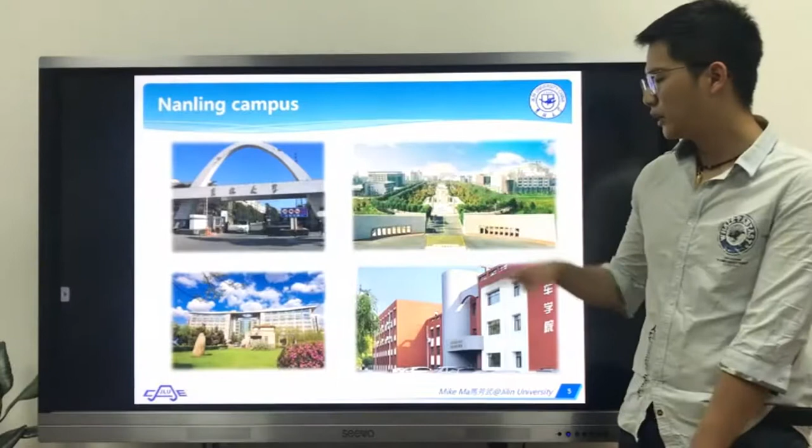I'm a student in Jilin University, which ranked top 10 in China. These are some pictures of my campus. This building is the National Laboratory of Automotive Simulation and Control.

My domestic supervisor is Mike Ma. He is not only a professor in Jilin University, but also the SAE Fellow and the Vice President of FISITA.

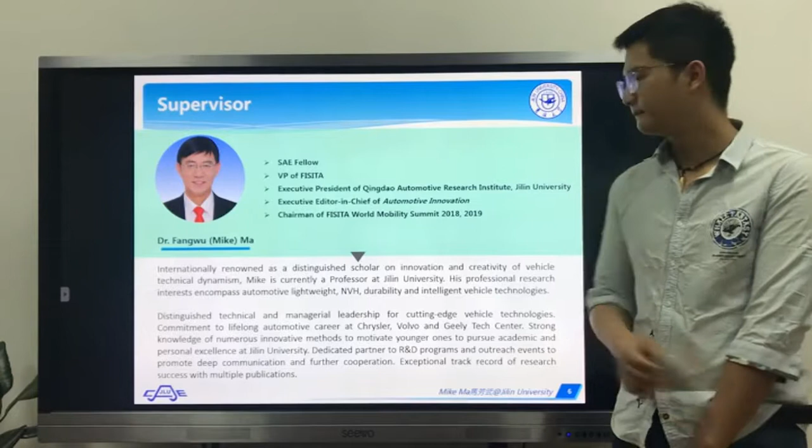My research interests cover connected and autonomous vehicle, advanced vehicle control. It is very honored to serve as main participant in a provincial research project named Cooperative Driving based on coupling control of connected and autonomous vehicle platoon.

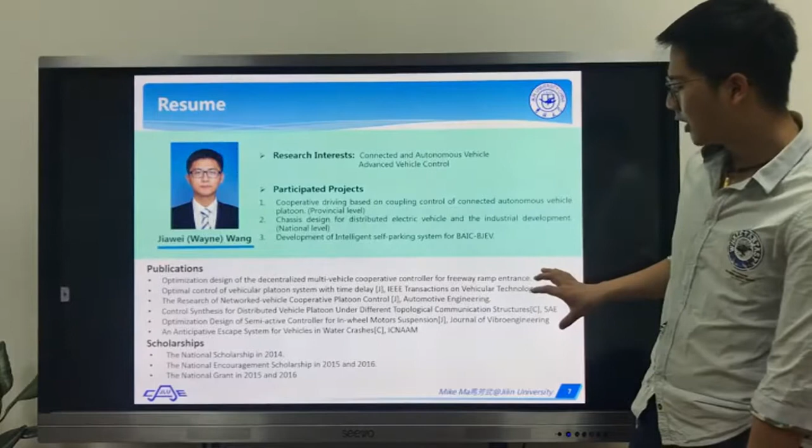I have 6 papers and 8 patents. Also, during the 6 years in Jilin University, I won many scholarships, especially the National Scholarship and the National Encouragement Scholarship.

About the practical experience, I want to share some things with you.

When I was an undergraduate student, I created the G-Speed team with other students to participate in Formula Student Electric China and won 7th place in our first competition. This is the advertisement video of this year's car.

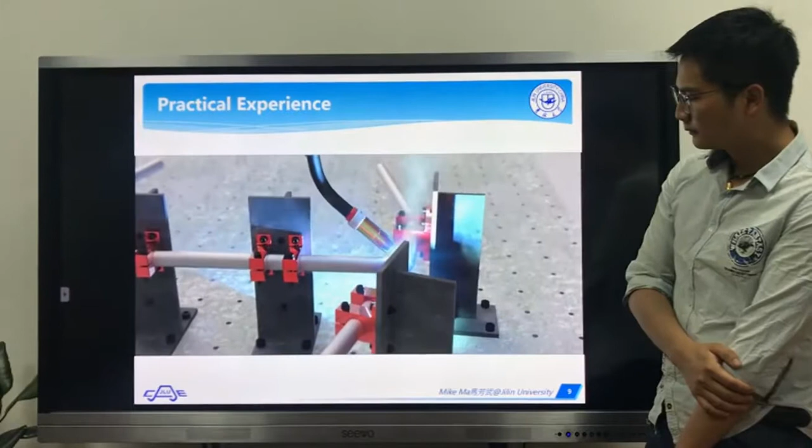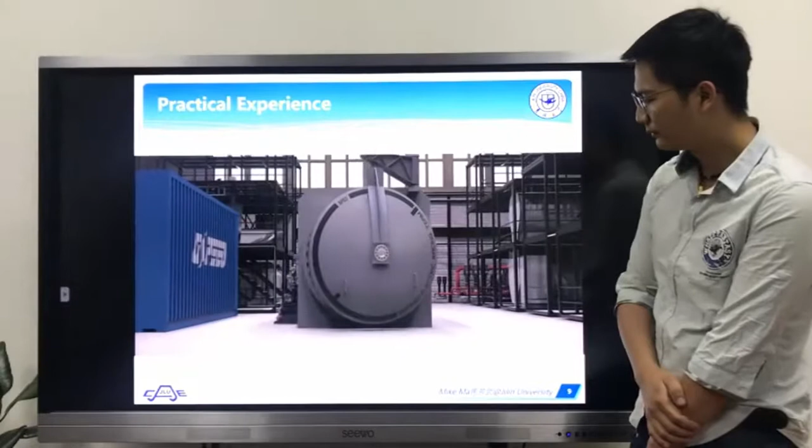The 3D printer is used to build some components, and this is the transmission system and the leader of this group. Carbon fiber is also used to decrease the weight.

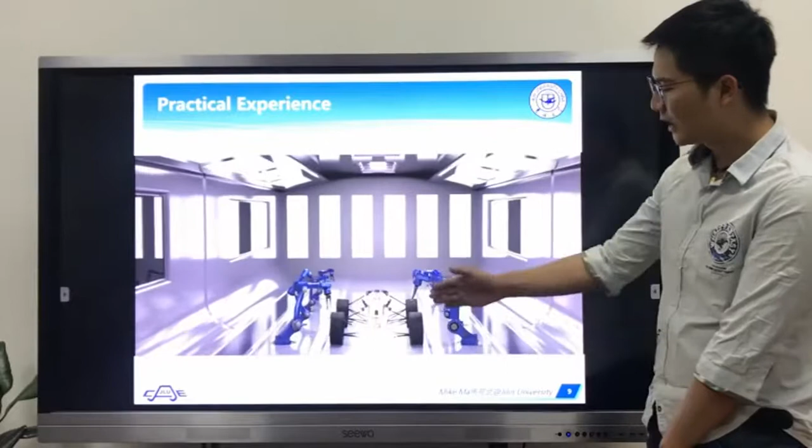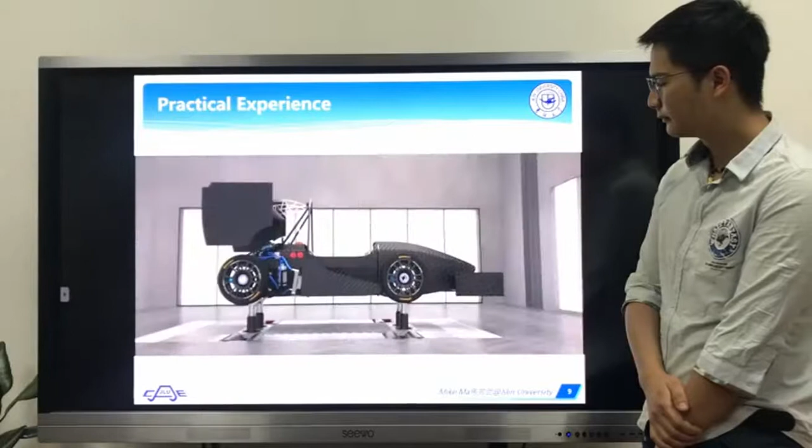The suspension, the braking system, and even the electrical system are all designed and built by ourselves. We also design the BMS. G-Speed feels the need for speed.

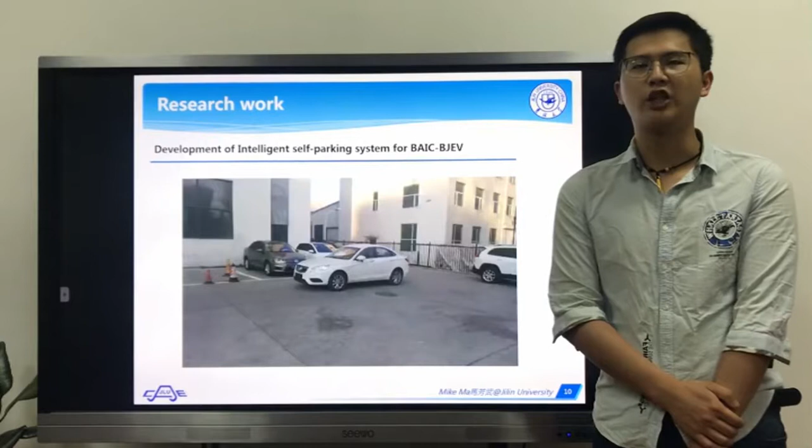In the first year of my graduate study, I was arranged to develop an intelligent self-parking system. During the following 6 months, I developed an algorithm to detect the parking space, size, and location. This is a video of the self-parking system.

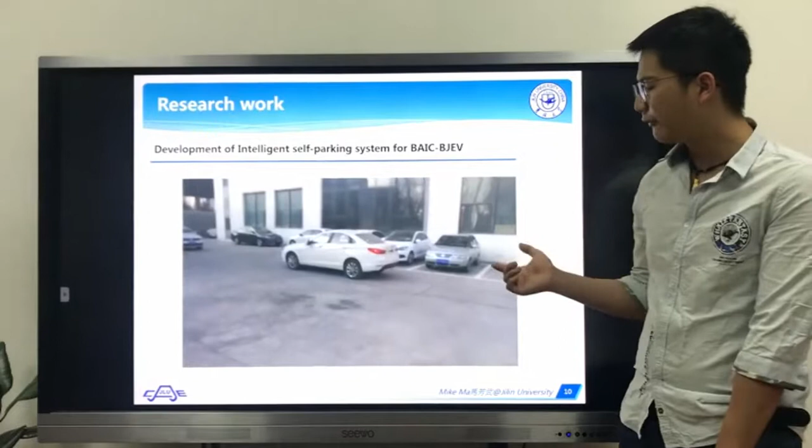When the vehicle drives through this parking space, the size and location is measured by the onboard sensor. If the space is big enough, the vehicle will stop and plan the trajectory to achieve parking. Now it starts.

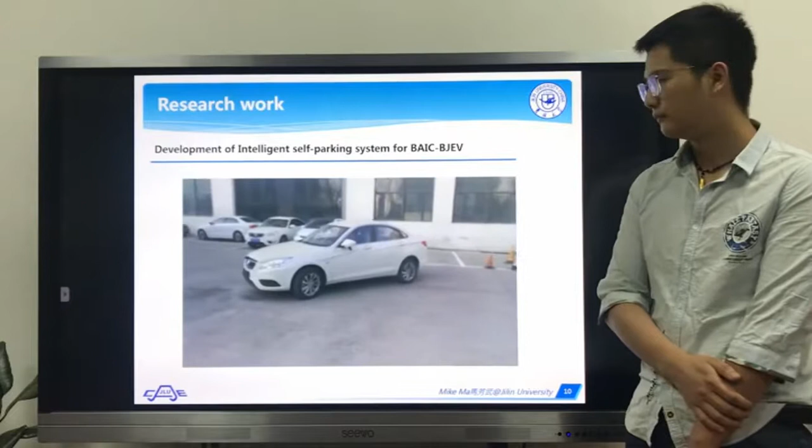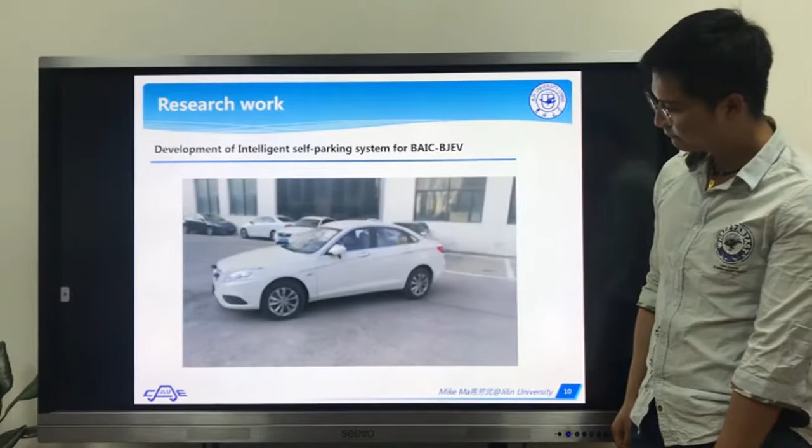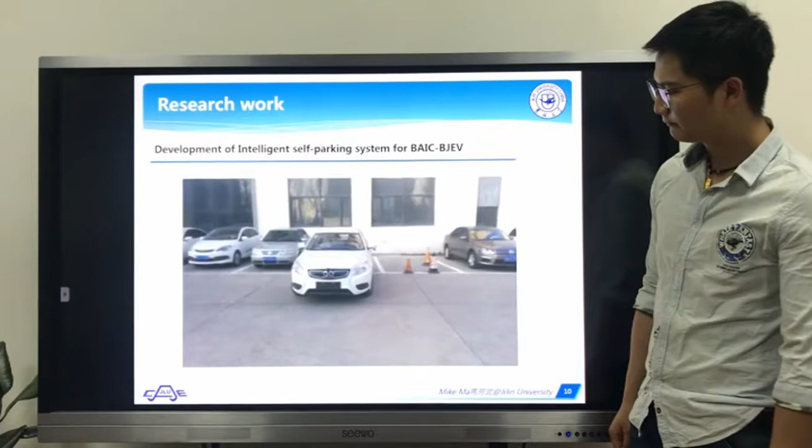The speed is a little slow. You can see the 2-step algorithm is used in this scenario. Now it finishes successfully.

As a consequence, the multi-vehicle control is very important in this program, especially the merging control algorithm.

Most participants come from foreign countries, such as the director of the Michigan Department of Transportation and the president of Toyota. I also had the chance to join the roundtable discussion with other experts.

Another one is Automotive Innovation, the first English academic journal of China's automobile industry. I'm employed as assistant editor to do some daily work. We have successfully published 6 issues until now. You are also welcome to submit your paper to this journal.

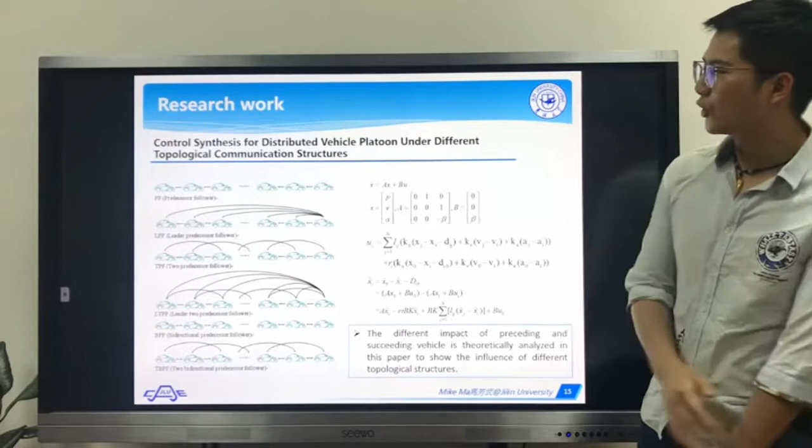This paper mainly focuses on the topological communication structure, and I analyzed these 6 typical structures. Graph theory is used to analyze the stability of the platoon system.

One thing worth mentioning is that this high-dimensional expression can be simplified to a 3-dimensional one, and it can be proved that when C meets this requirement, the platoon is stable.

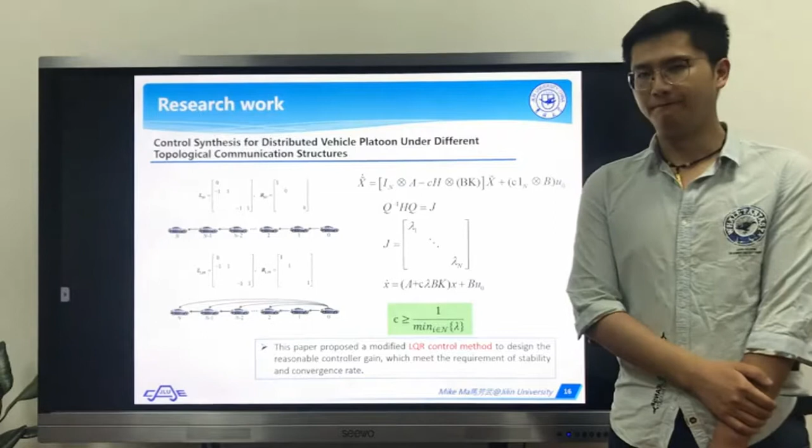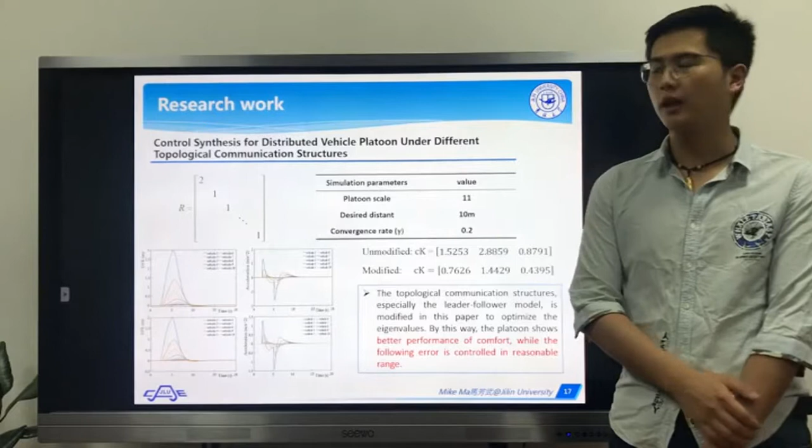And the control gain of this system is modified by the LQR method. Another highlight of this paper is that I make all eigenvalues the same by changing the pinning matrix, and the simulation shows that the modified platoon has better performance of comfort while the following error is controlled in a reasonable range.

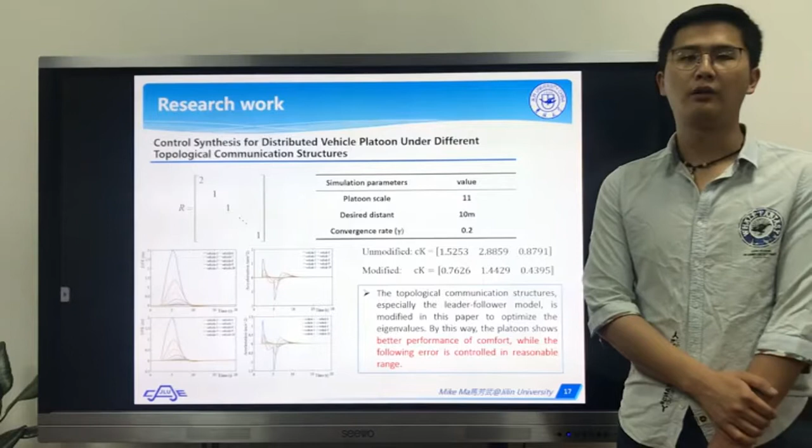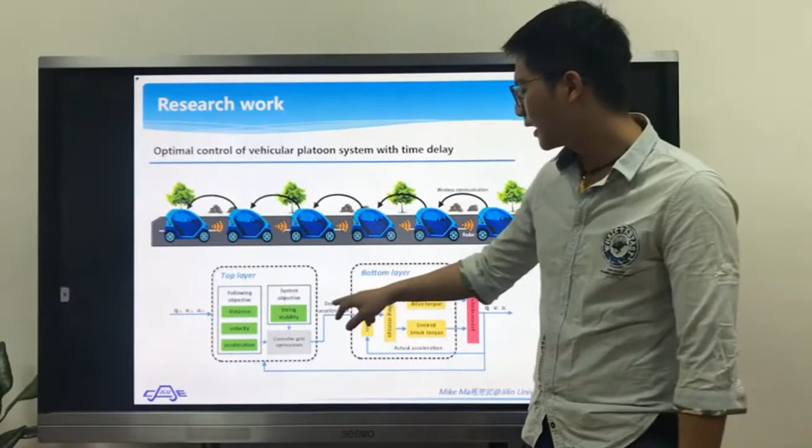Another paper is about string stability. In this paper, a 2-layer structure is used, and the controller gain is optimized in the top layer to calculate the desired acceleration, and the bottom layer is designed to follow the trajectory.

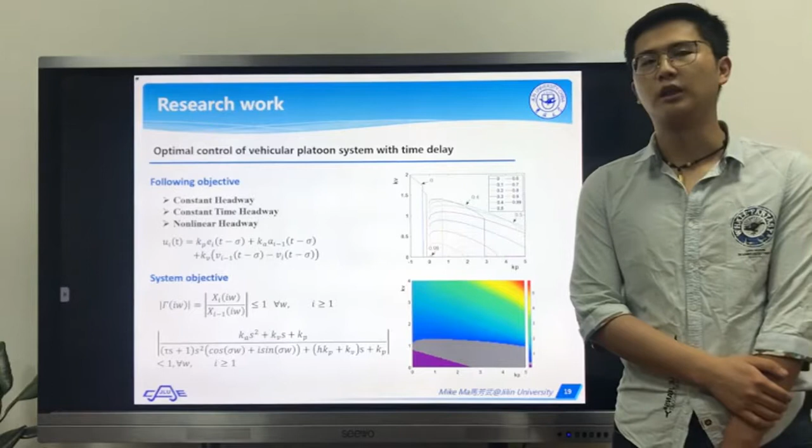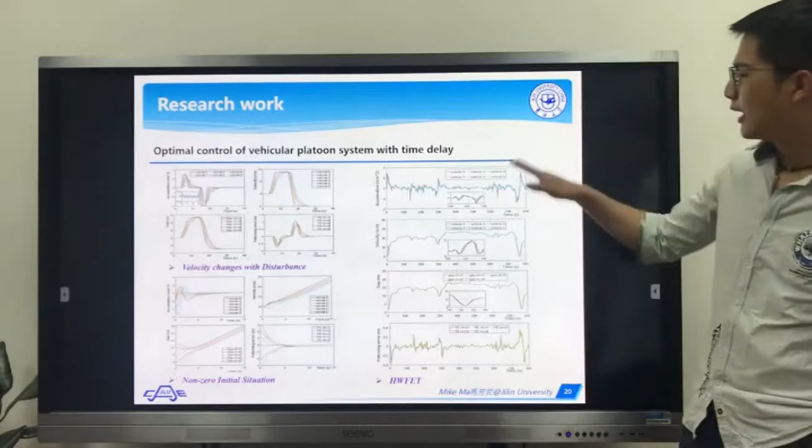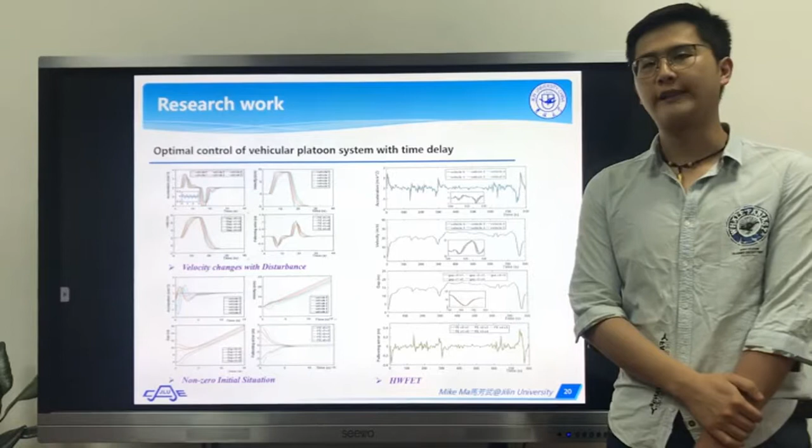The simulation results are carried out in three different scenarios: velocity changes with disturbance, non-zero initial situation, and the highway situation. It shows that the controller resists disturbance and quickly stabilizes the system. Smaller spacing error and higher traffic efficiency can also be achieved. I have submitted this paper to IEEE Transactions on Vehicular Technology.

The latest paper is about merging control in highway on-ramps, finished about one month ago. In this paper, I modeled the vehicle as a point and ignored the influence of lateral dynamics of the vehicle. This paper mainly includes three components.

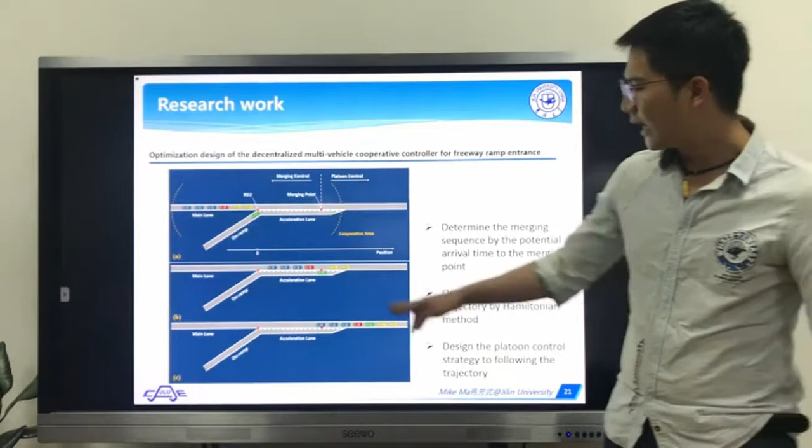First, I determine the merging sequence by the potential arrival time to the merging point. Of course, it's very simple, but I plan to design a more suitable algorithm to determine the merging sequence in future research. Then the trajectory of the merging vehicle and the lag vehicle is optimized using the Hamiltonian method.

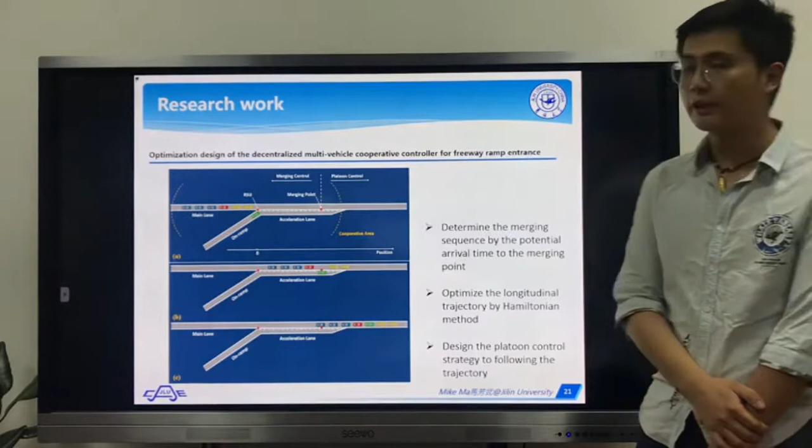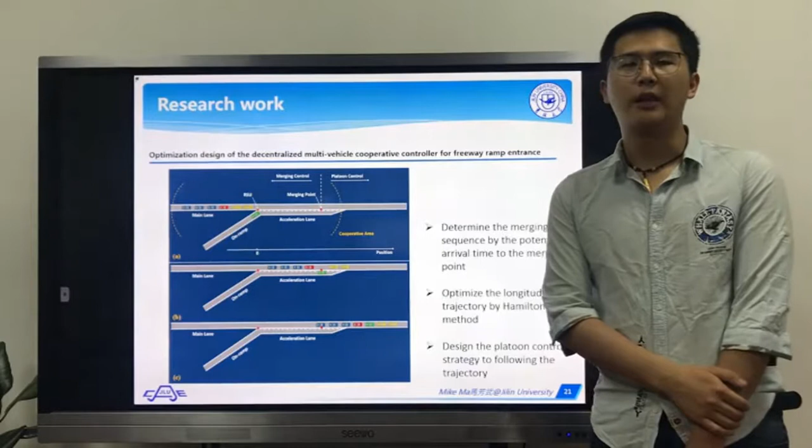The trajectory will lead the merging vehicle to arrive at the merging point at a suitable time, and a sufficient gap will be created. Finally, I designed the platoon control strategy to follow the trajectory, which is very similar to the above two papers. In this paper, I simulated a special scenario in which an on-ramp vehicle wants to cut into the mainline platoon.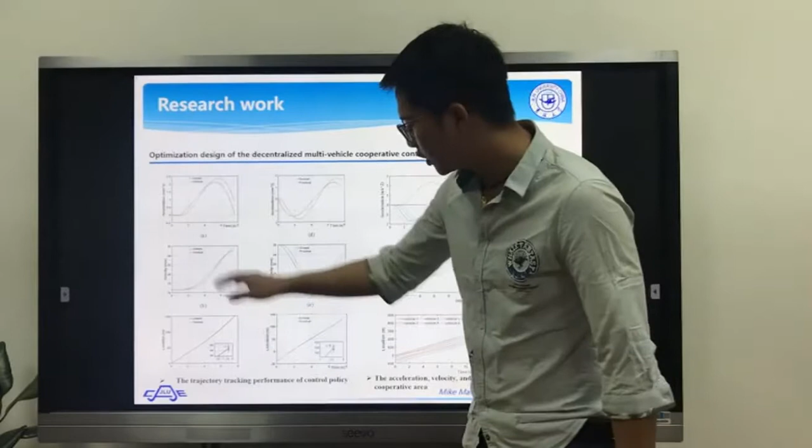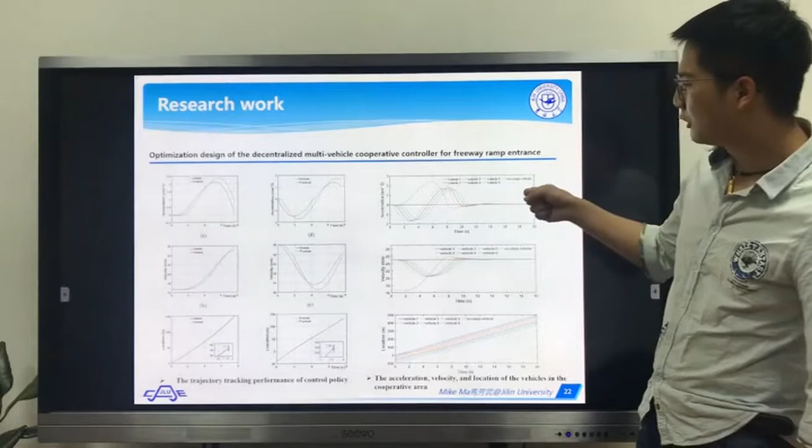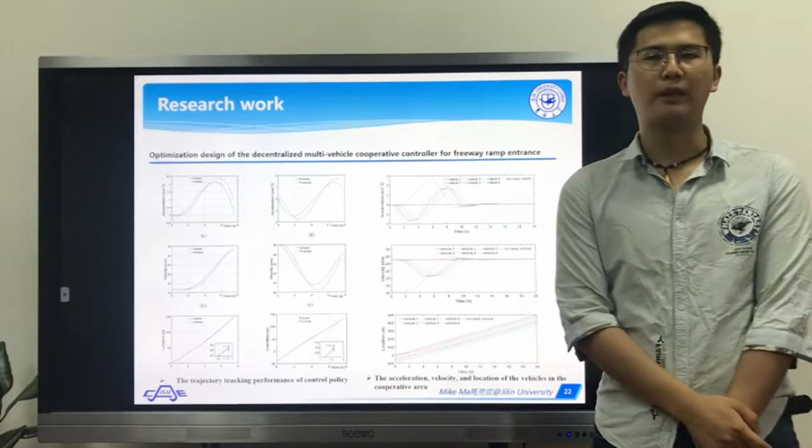These six pictures show the trajectory tracking performance of the control policy proposed in this paper, and these three pictures show the acceleration, velocity, and displacement of the vehicles in the cooperative area. It shows that the on-ramp vehicle cut into the platoon successfully without collision.

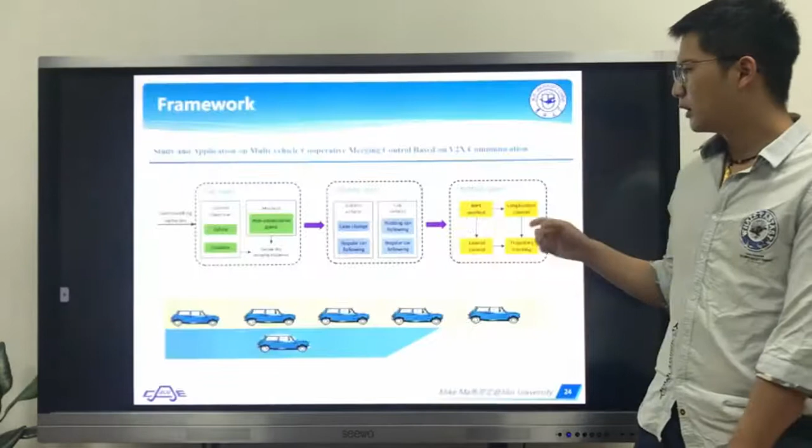My research plan for the following two years is based on my previous work, with some improvements to be made. It will be studied as an application of multi-vehicle cooperative merging control based on V2X communication.

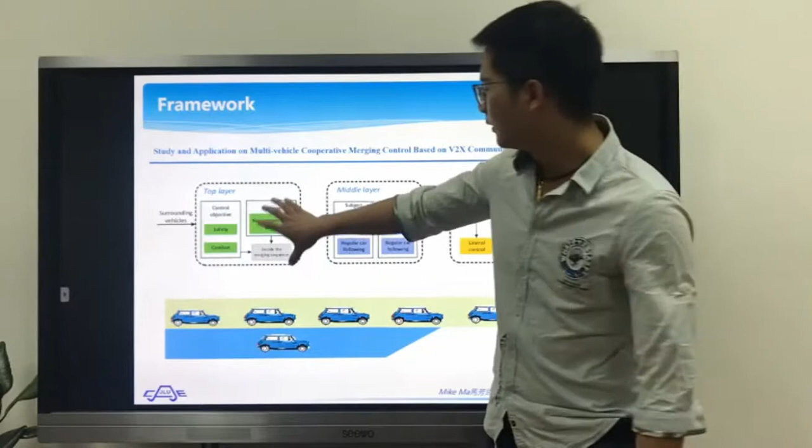As for traditional lane change control, the system only controls the subject vehicle and changes lanes only when the gap is big enough. But this assumption is quite different from the real situation, especially in this scenario. So I will design the top layer to decide the merging sequence, meaning where and when to merge.

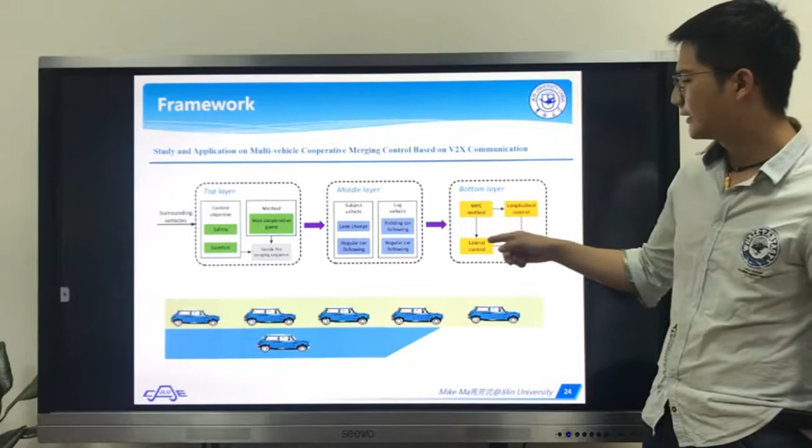In the middle layer, I will control the subject vehicle and the lag vehicle respectively. And the bottom layer includes the longitudinal control and the lateral control to assure trajectory tracking.

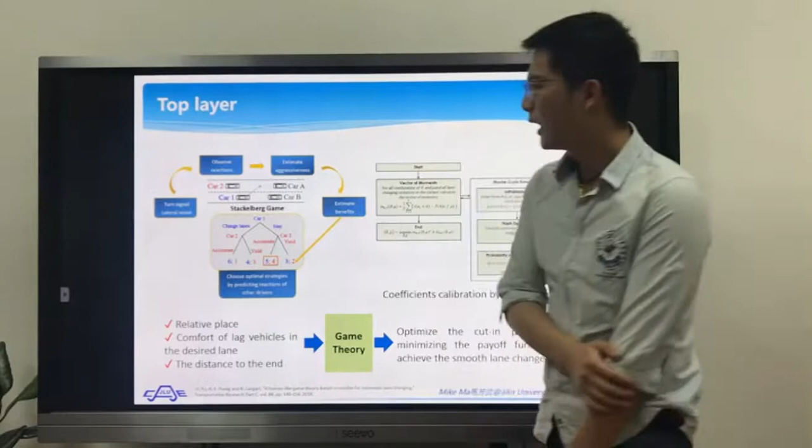The merging scenario can be described as a non-cooperative game. The subject vehicle wants to merge into the desired lane and assure higher speed or avoid collision in the initial lane. But the lag vehicle in the desired lane has two choices: decelerate to create a gap for the subject vehicle, or ignore the merging requirement.

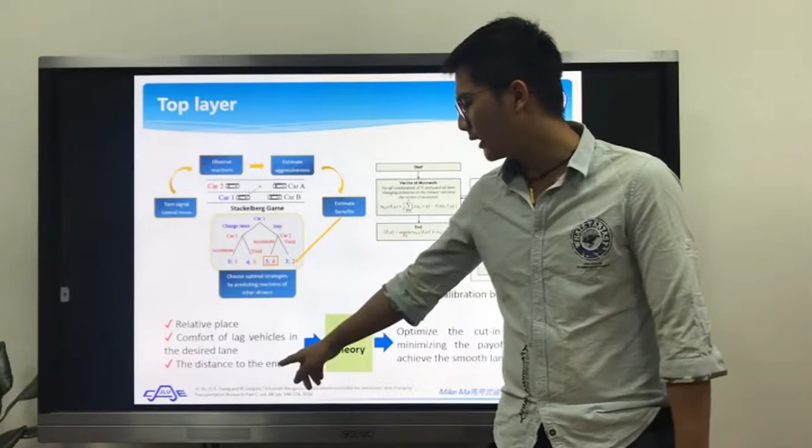I will pay more attention to human-like game theory. The game considers the relative position between vehicles, the comfort of the lag vehicle in the desired lane, and the distance to the end, specifically for the on-ramp scenario. The cut-in point will be optimized by minimizing the payoff function to achieve smooth lane change.

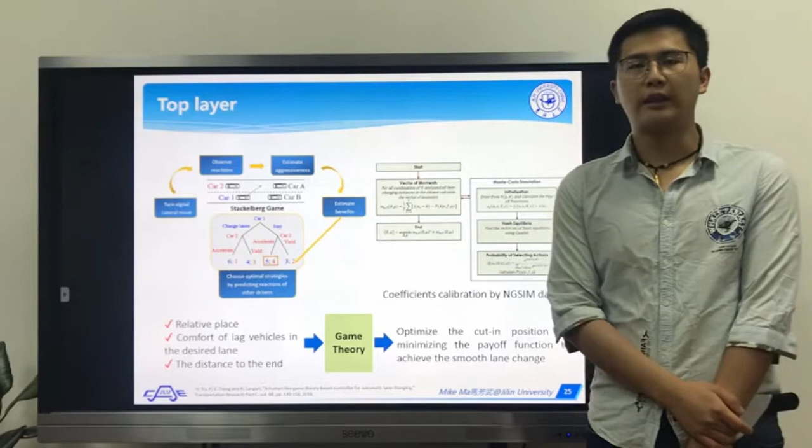The NGSIM data will also be used for calibration of the game model.

In the middle layer, three dynamic models have to be designed: the lane change model, the regular car-following model, and the yield car-following model.

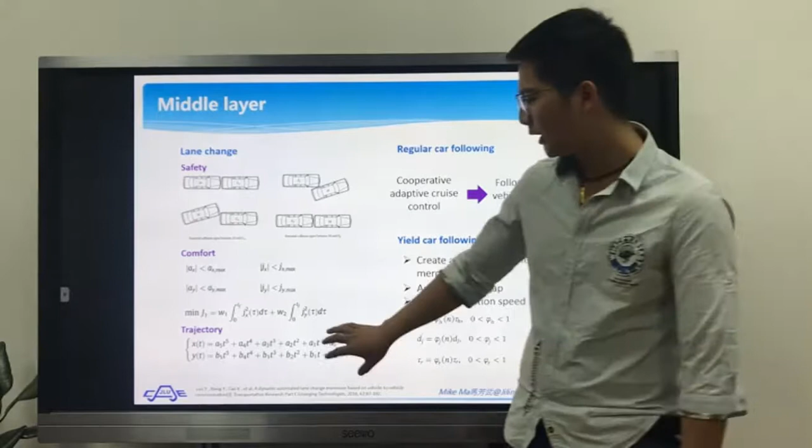In the lane change model, it has to ensure safety. I propose some situations, and the cost function should be defined by comfort or even traffic efficiency. Based on the constraint and the cost function, the trajectory can be optimized in this form.

As for the regular car-following model, it is similar to CACC control, and it is designed to follow the preceding vehicle or freeway speed. The last is the yield car-following model, which is designed to create a sufficient gap for the merge. In this model, a smaller gap is acceptable.

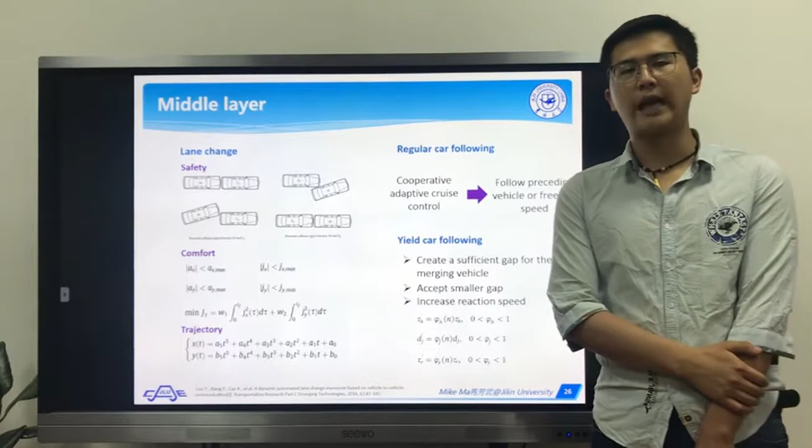The last one is trajectory tracking. One of my colleagues has done some research on adaptive MPC control. The main advantage of this method is that it can ensure control performance no matter how the speed is changed. I will follow his approach to improve this system.

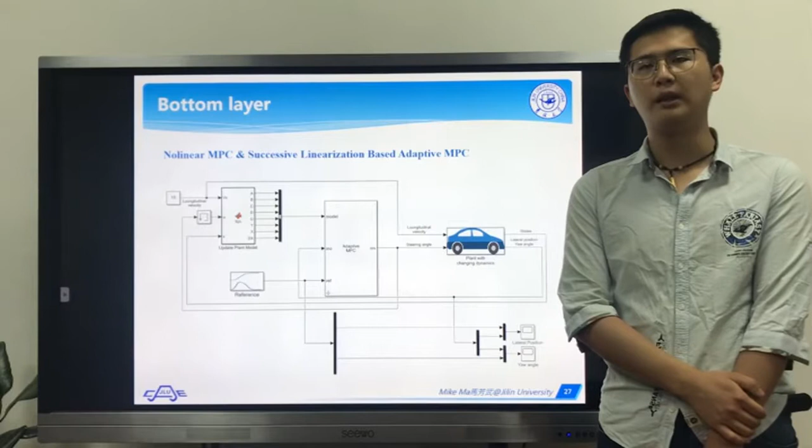This is my research plan, and I would make some adjustments to it according to the requirements of the project you have.